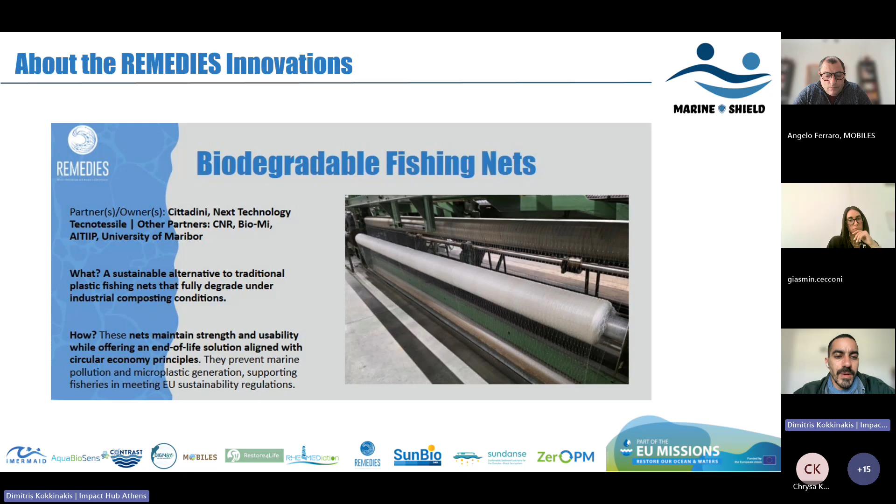Moving on, this is a solution developed by Cittadini, a big company that provides fishing equipment based in Italy, with a lot of different partners, like Next Technology, and also CNR, Bio-Mi, AITIIP, and University of Maribor. This is also a big innovation, a sustainable alternative to traditional plastic fishing nets that fully degrade under industrial composting conditions. So it's biodegradable nets, as we can say. These nets maintain the strength, durability, and usability, but they have an end-of-life solution that is aligned with circular economy principles. These nets have been tested with fishermen in Italy and in Mykonos in order to get valuable feedback for possible adoption of this type of nets from local communities. The idea is that they prevent pollution and microplastic generation, while they support fisheries in meeting EU sustainability regulations.

Moving on, this is Wasser 3.0 PE-X. It's a company based in Germany with an innovative solution for the detection of microplastics in various waters and their removal using agglomeration and fixation, including a full reuse concept.

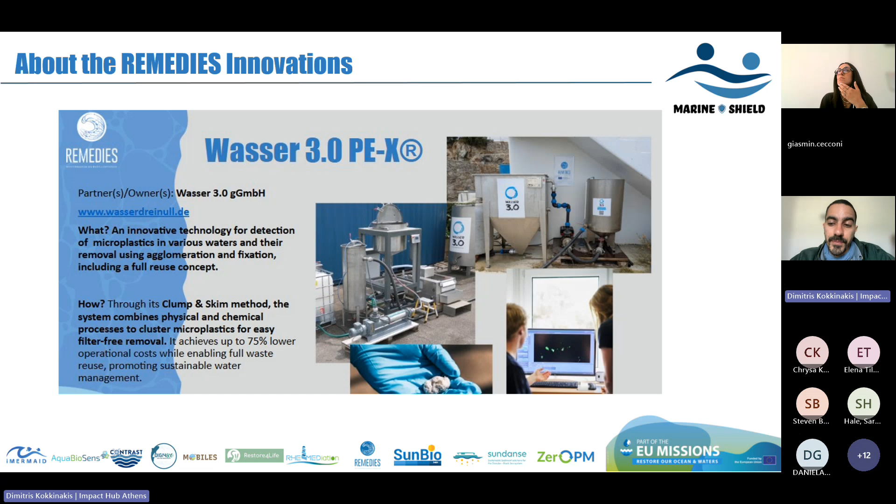It achieves up to 75% lower operational costs while enabling full waste reuse, promoting sustainable water management. The water that comes out as an output from the Wasser 3.0 treatment can be used for irrigation or for other purposes in agriculture or secondary uses.

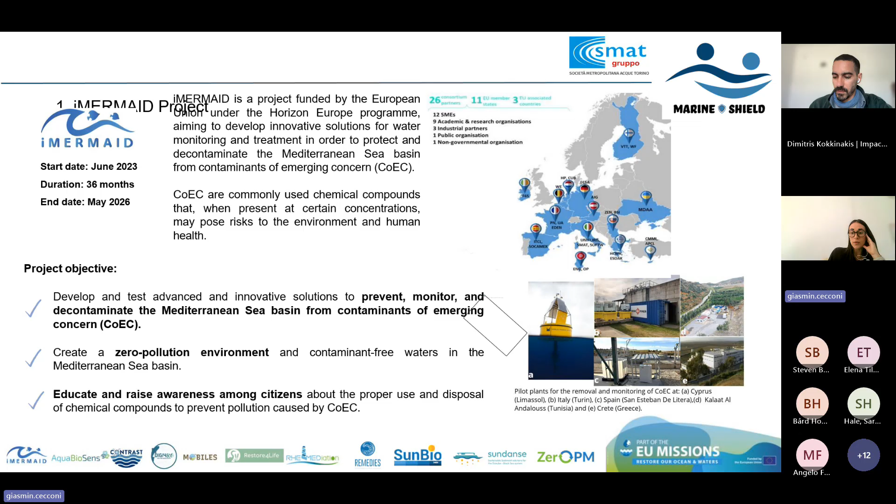The first use case is located on a buoy in Cyprus. The second, which I will present today, is in Italy at a wastewater treatment plant facility. The third is in Spain, at another wastewater treatment plant. Another is in Tunisia, at a wastewater treatment plant in an industrial site within a pharmaceutical industry. And the last is in Greece, at a landfill for monitoring leachate.

Today I will present use case number 3, entitled 'Pilot Plant for the Removal and Monitoring of Heavy Metals from Wastewater,' located at one of the wastewater treatment plants managed by SMAT, in Brandizzo, near Turin.

This wastewater treatment plant treats both industrial and domestic wastewater, which after treatment is released into the nearby river. The problem we wanted to target with this pilot is that if high concentrations of pollutants reach a wastewater treatment plant, they may not be completely removed and can be released into the water body.

The pilot to assess this problem had a duration of 2 months, in April and May 2025, and focused on the demonstration of two main technologies.

The first, developed by the Finnish startup Weeefiner, is called the 4D Scavenger, for the removal of copper, zinc, and aluminum. The second, developed by the University of Florence, is a heavy metal box based on an electrochemical sensor for monitoring zinc, cadmium, lead, and copper.

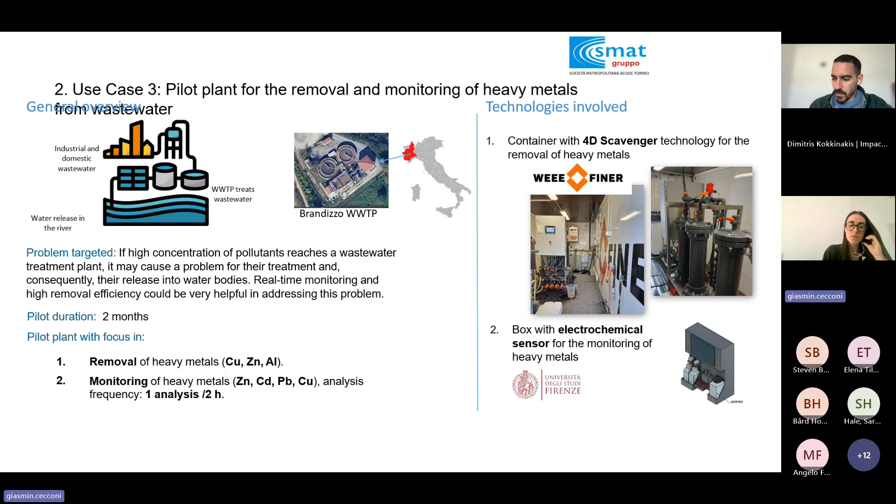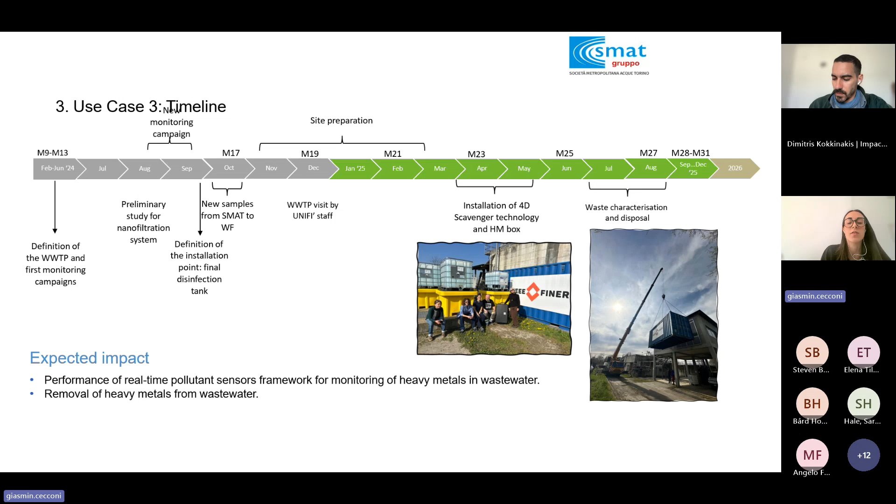Here I have reported a detailed timeline of all the activities we performed, starting from site preparation until the end of the pilot with waste characterization and disposal. I will present the main points.

First, we had to define the best site to install the technologies, which turned out to be the Brandizzo wastewater treatment plant. Here you can see an overview of the plant and its treatment steps. Then we had to define the best installation point for the technologies.

We did that by performing tests and also shipping samples to the technology provider. We took into account two possible installation points: the first at the fine screening step, at the beginning of the wastewater treatment, and the second at the end of the process, in the final disinfection tank.

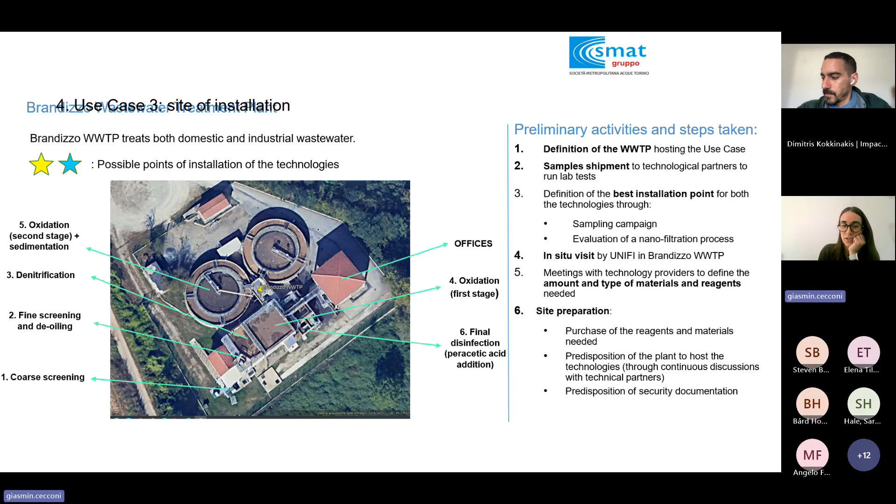To define the best installation point, we had to consider the requirements provided by the technology provider. For the removal technology, the TSS content in the wastewater should be below 5 ppm, while for the monitoring heavy metal box, we needed a TSS content below 25 ppm and a BOD below 15 ppm. To determine the best point of installation, we considered the historical trend of these parameters at the two investigated points, and here you can see the data for the final disinfection tank.

We also had to take into consideration the fact that Weeefiner, the supplier of the 4D Scavenger technologies, was able to implement and develop a filtration system that could remove TSS content sufficiently if the TSS content was below 20 ppm. Looking at the historical series, we see a median TSS value of about 7 ppm, so we concluded that the best point of installation is in the final disinfection tank.

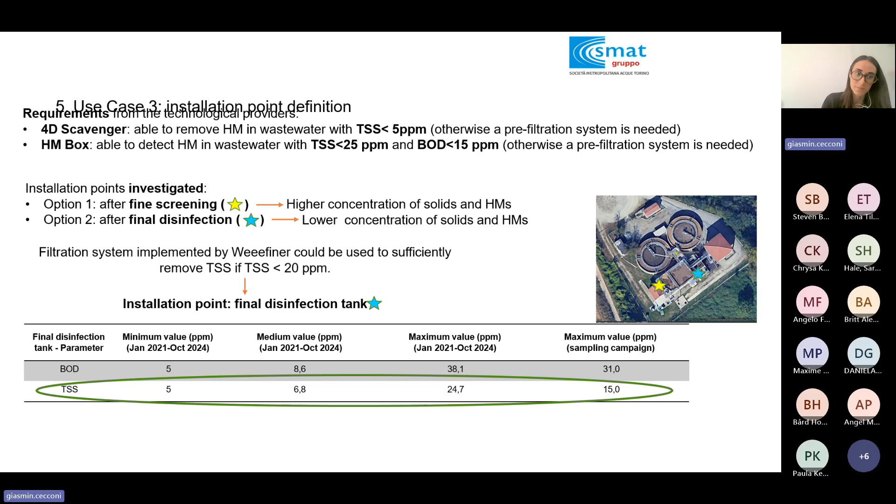In April 2025, we finally were able to host both technologies. The 4D Scavenger was shipped from Finland inside a container, so we used a crane to place the container and the technology in the wastewater treatment plant.

We had to provide electrical connection and well water. We had to supply reagents and equipment and prepare some solutions needed for the metal box, shown in the photo, to perform calibration and maintenance activities. We also had to provide on-site assistance for maintenance and to optimize the analytical protocol of these technologies.

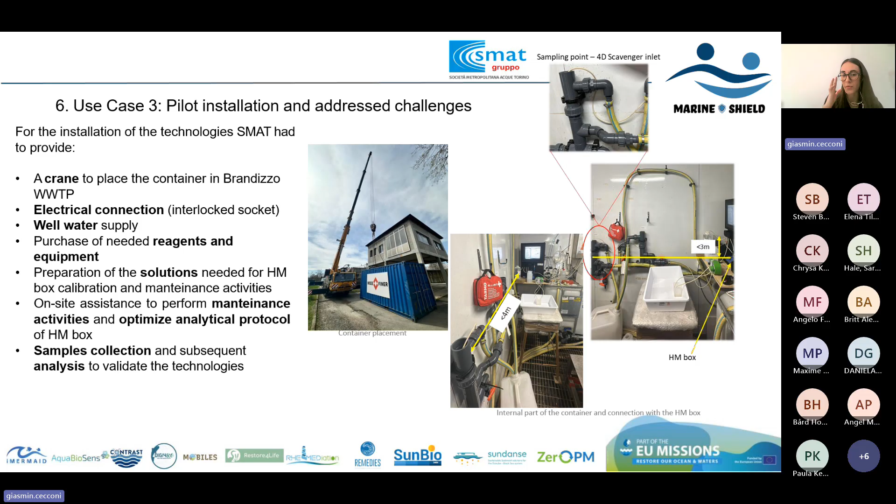During the pilot, we also collected samples in order to validate both technologies through analysis performed in our accredited laboratory. Of course, during the pilot, we had to address some challenges for both technologies.

We can start with the heavy metal box. I'm sorry that in the slides there was some movement, so we cannot see the titles very well. What we experienced was high electrical noise in the instrumentation, due to other instrumentation connected in the wastewater treatment plant.

We solved these problems by changing the pretreatment protocol of the sample, using hydrochloric acid instead of acetate buffer, grounding the instrumentation, and using a noise filter.

We also had the formation of air bubbles inside the measuring cell, which prevented us from performing the measurement. So we had to purchase an additional tank and an additional peristaltic pump in order to pump the water inside the tank and let it sit there to degas for 2 hours before analyzing it through the heavy metal box. In these 2 hours, the dissolved oxygen was able to be released into the atmosphere, removing the air bubble formation.

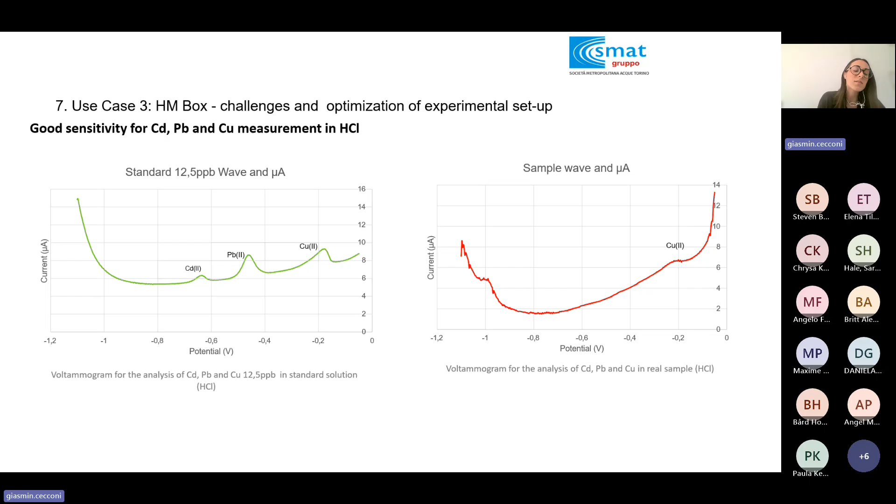Through this approach, using hydrochloric acid, we were able to perform analysis for cadmium, lead, and copper with high sensitivity. Here you can see a real voltammogram of one of the samples in Brandizzo, with a signal connected to copper.

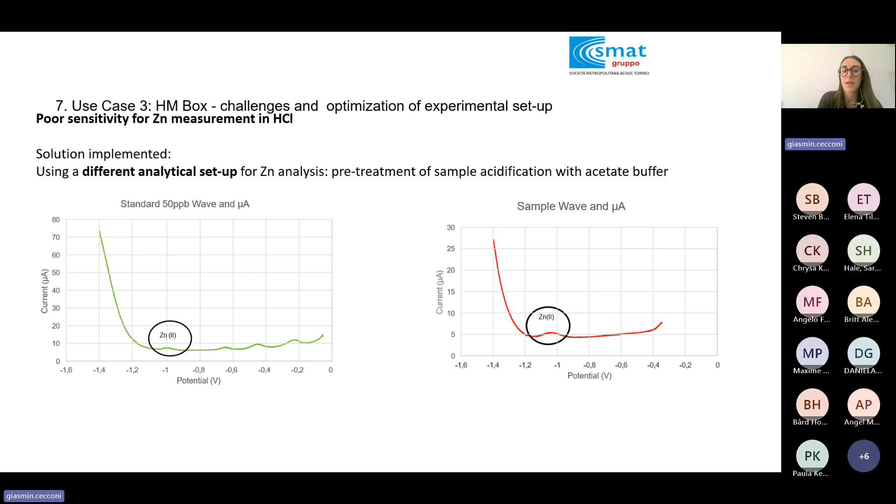But this approach wasn't able to give us sufficient sensitivity for zinc analysis. For this heavy metal, we had to switch back to the initial pretreatment protocol using acetate buffer, and in this way we were able to obtain very good voltammograms in real samples of Brandizzo. Here you can see the signal related to zinc.

Regarding the 4D Scavenger, the technology for the removal of heavy metals, more regeneration cycles than foreseen have been necessary, because once the capacity of the filters to remove heavy metals was full, we had to use two reagents, an acid, sulfuric acid, and a base, to wash and regenerate the capacity of these filters. During the pilot, we experienced that more regeneration cycles were needed than foreseen.

What was needed at this point, at the end of the pilot, was to reach the KPI and lower even more the limit of detection for cadmium. So more analysis and more tests needed to be performed at the University of Florence laboratory.

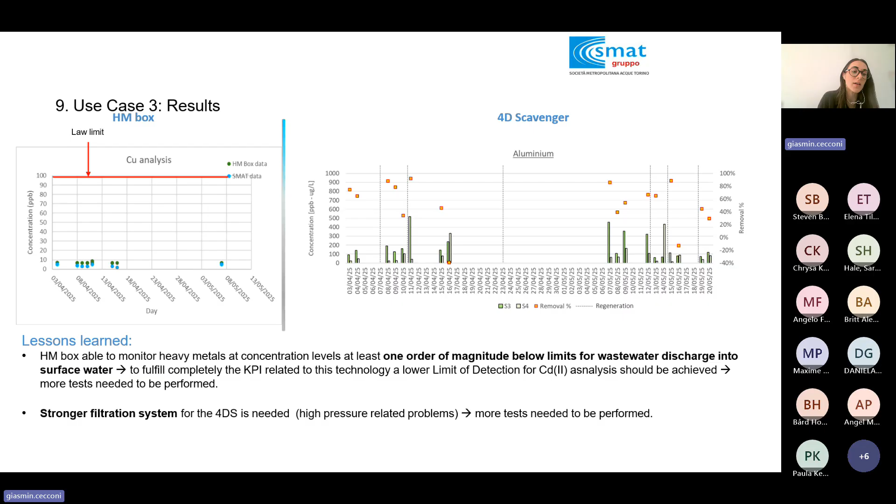So also for these technologies, after the pilot, additional tests needed to be performed. I will explain briefly the post-pilot activities done to reach the two KPIs. The first one for the heavy metal box is to reach a limit of detection below the predicted no-effect concentration, as you can see reported here.

As you can see, during the pilot, just for cadmium we were not able to reach a limit of detection that was low enough. So we had to do additional tests at the University of Florence, and they made adjustments in the measurement protocol of the system. You can see how we were able to lower this limit of detection below the PNEC value, and in this way achieve the KPI for all the targeted heavy metals.

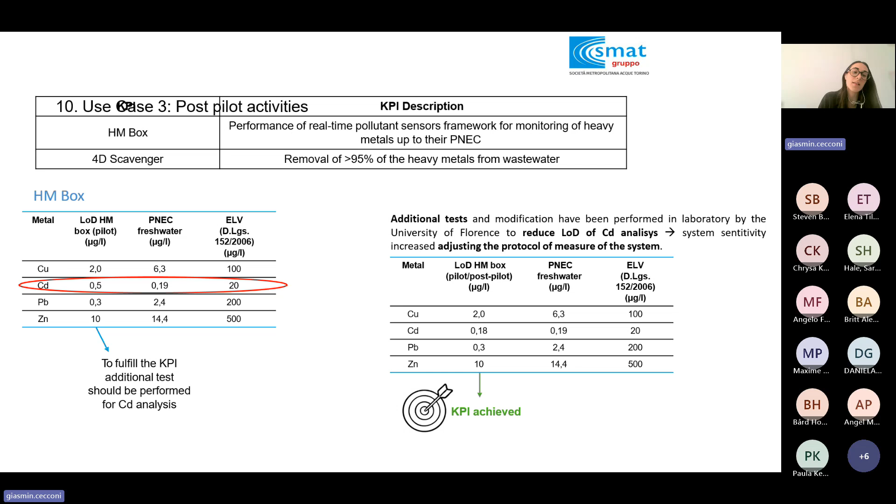They also did another pilot on site at a real industrial facility in Finland, just for zinc, and for bed volumes below 500 or 1000 they were able to reach this removal efficiency. So also for these technologies, with post-pilot activities, the KPI was reached.

That's all for my side, thank you for your attention, and let me know if you have any questions and we'll reply to them.

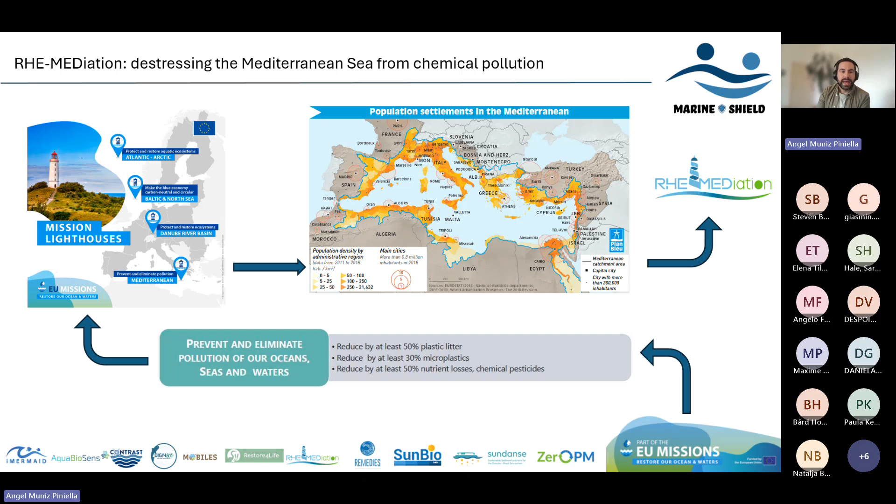Just a little explanation about wastewater treatments. So of course, when you have water, for instance from a city, you have to filter the water when it comes into the water treatment plant. Then you have the primary treatment, where it basically sinks the particle matter that is in the water.

Then you have a secondary treatment, which involves microbial breakdown of organic matter, and then you can have tertiary, which also treats nutrients. You can also have a quaternary treatment if you want to target more specific pollutants like pharmaceuticals or other industrial waste. And then you also have disinfection to remove potential harmful organisms.

Just as a reference, this is for environmental protection regulations. This is a black box. So in general principle, the pollutants that go in have to be more than what comes out, and whatever goes out has to be cleaner. In general, regulations don't care what kind of technologies or processes are used, it just has to be cleaner afterwards. So that's also the added value of the RHE-MEDiation system, that it can be plugged in after any already existing treatments.

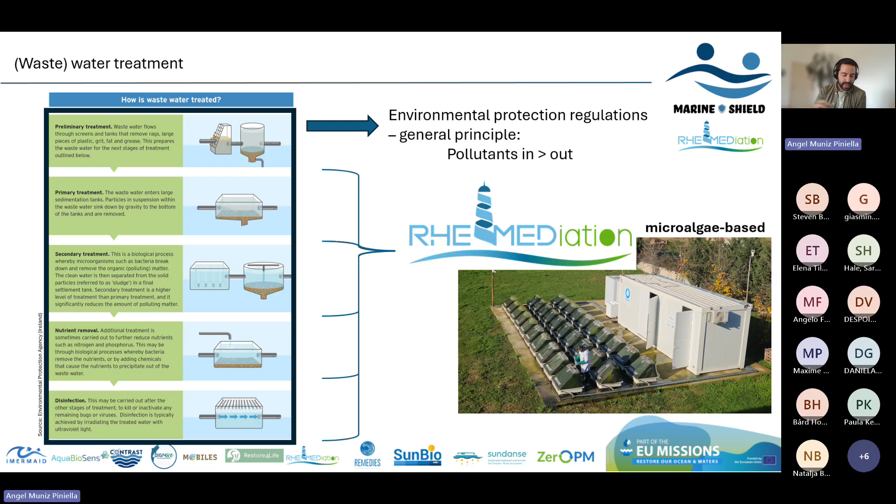So how does it work? I'll come back to what we call the RHE-MEDiation approach. You have the water that you want to treat, it could be natural waters, but also it could be from wastewater. Then it goes to the system, with the container and the photobioreactors. Within this container you have at the back the dirty water, which is monitored with different probes and measurements, because of course you need to assess what kind of pollutants are in this water, and know what needs to be treated.

So you need to measure this. Then that water that has been measured goes through the different photobioreactors, which promote the growth of the algae that is naturally present in the water. You don't have to add any other species or any chemicals, it grows naturally. So if you are a particle of water, you will travel through these different photobioreactors until you reach the end, and of course you can determine how long the water will stay in this system or not.

So that's also quite flexible, depending if you have really dirty water or many nutrients polluting it. The microalgae will use the nutrients present in the water, and also capture different pollutants present in the water. These photobioreactors act like an ecosystem of their own, because when the algae die off, they get remineralized by other algae, using the nutrients, so you don't have to clean it up too much. Then this water goes to this other tank that you can see at the forefront.

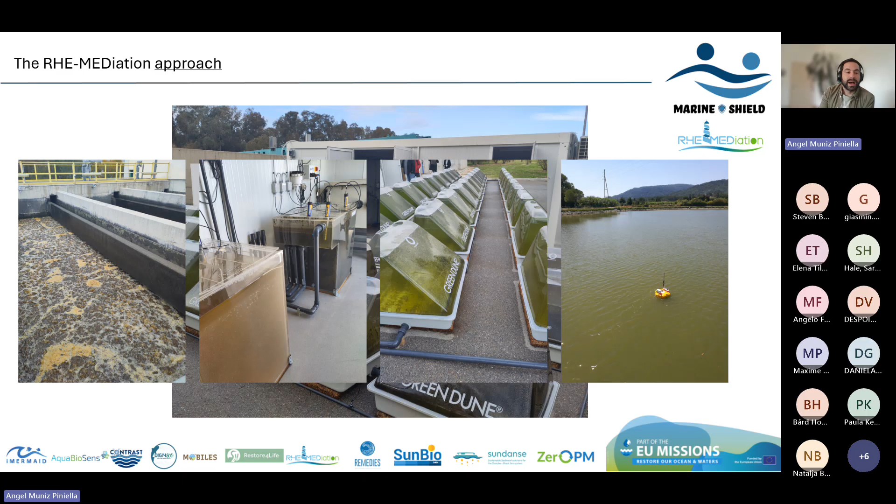So this is just a summary infographic of what I just explained, and I will present in a bit the different test sites. But what I want to highlight here is that the information coming from the sea trials - all these buoys that are in the environment at the end of the rivers, or also in marine waters - that information is transmitted to the European Marine Observation and Data Network, EMODnet, which could also be contributing to the digital twin of the ocean.

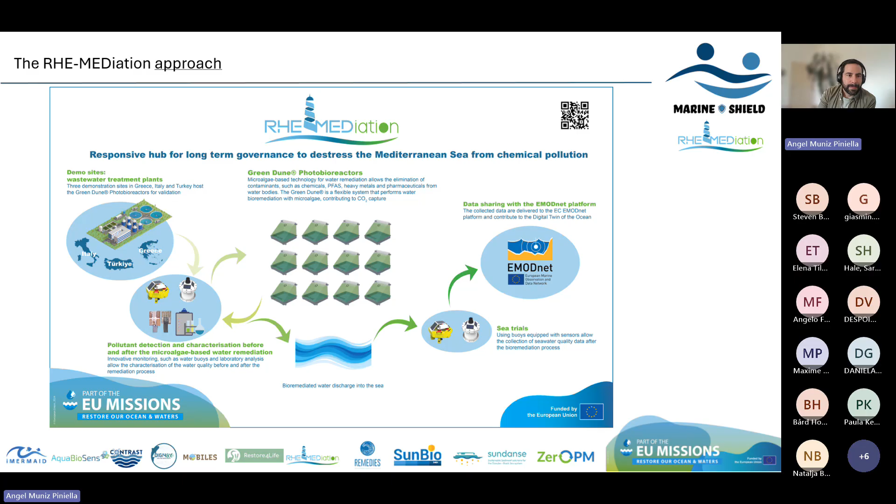For the testing sites, I will show different images of how the evolution of the water looked. One is in Taranto, Italy, where it was tested with natural water - this is when they just installed it and you have clear water. Then we also tested in a wastewater treatment plant in Attica, Greece, and then also in wastewater treatment in Kocaeli, Turkey.

We helped local authorities in Bulgaria, Egypt, Moldova, and Morocco develop replication strategies and roadmaps to potentially implement this kind of system. Of course we didn't fund the implementation of this technology, just checked what kind of water, and what objectives they want to clean the water for. So this is also, in terms of other projects, what we did through a call for associated regions.

What I mentioned is we call it the RHE-MEDiation approach, because not only the technology and the system, but also there was an important component: stakeholder engagement. So we did, at the beginning, in the different test sites, and also we will do in the next month, other stakeholder workshops, and also we engage with the local communities and local policymakers, and also they had visits from schools and so on.

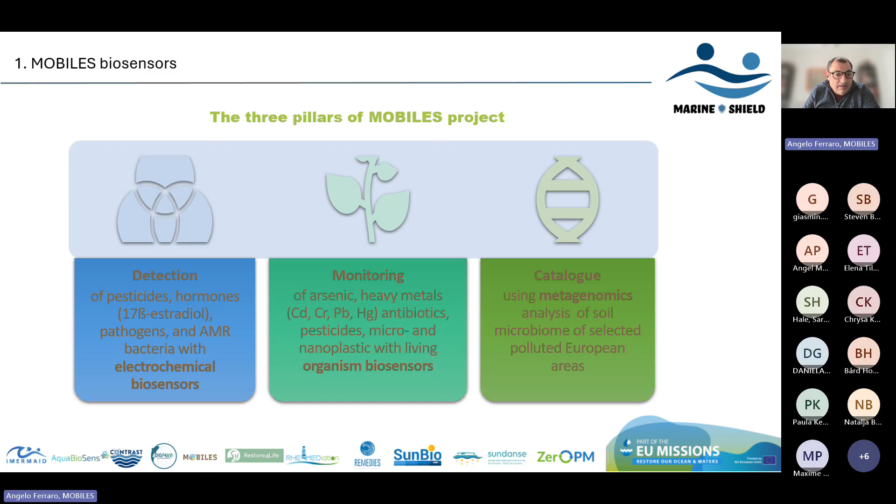So what are these electrochemical biosensors? Basically, they are formed by two components: one is the bioreceptor, also called the biorecognition element, and then there is an electrochemical transducer, so an electric circuit.

Here you can see these two elements. We can have antibodies, pieces of DNA called aptamers, enzymes, whatever, and usually they are attached, immobilized on the transducers - that is the electrode part of the system. So when these two components are together, they form a stable system where when chemicals, the target pollutant or any kind of analyte, touch the biorecognition element, it triggers an electric signal that can be detected.

And there are different techniques that we can use: differential pulse voltammetry, cyclic voltammetry, square wave voltammetry, electrochemical impedance spectroscopy. Each one of these techniques gives a sort of wave, and the wave is perturbed when there is binding between the biorecognition element and the target pollutant.

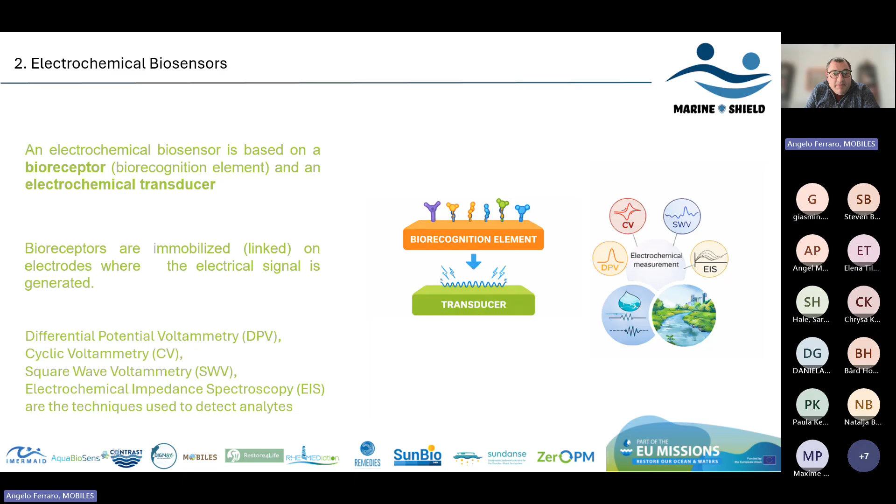Now, the typology of electrochemical biosensors are many. Usually, we use natural bioreceptors that can be found in organisms - as I said, antibodies, enzymes, nucleic acid, but also viruses. These are bacteriophages - viruses, whole cells, membranes, or also organelles.

They are a small part of a more general family of electrochemical sensors. So when you use a bioreceptor, we call it a biosensor, but you can even use inorganic stuff like nanoparticles or organic linkers, both synthetic or natural. You can construct with almost any kind of material a sensor where you immobilize a receptor on an electrode, and then you measure how it changes the electrical properties of the electrode.

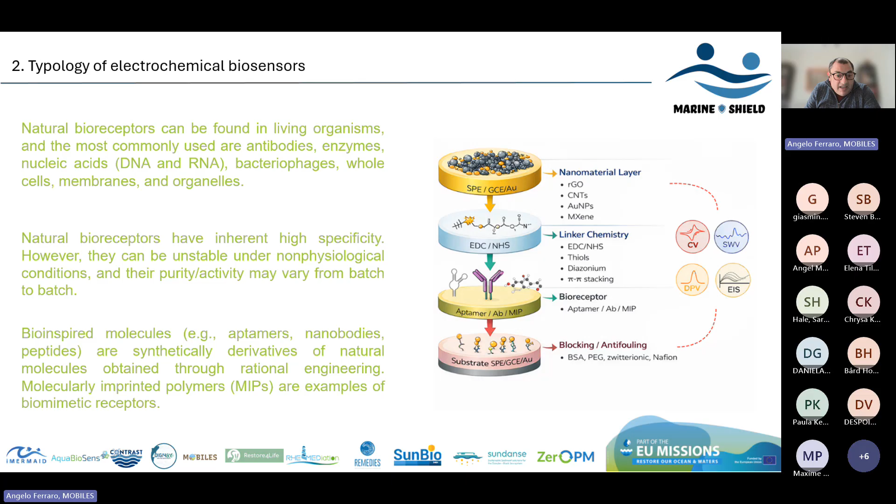Now, let's focus on the aptamers - what are they? They are single-strand DNA, RNA, or XNA nucleic acid - I will come back on this X. They fold into a 3D structure, and this 3D structure gives them the ability to bind a biomarker, or it can be pollution, can be anything. This binding is highly specific, so when the biomarker attaches the target aptamer, this means we have high specificity and high sensitivity.

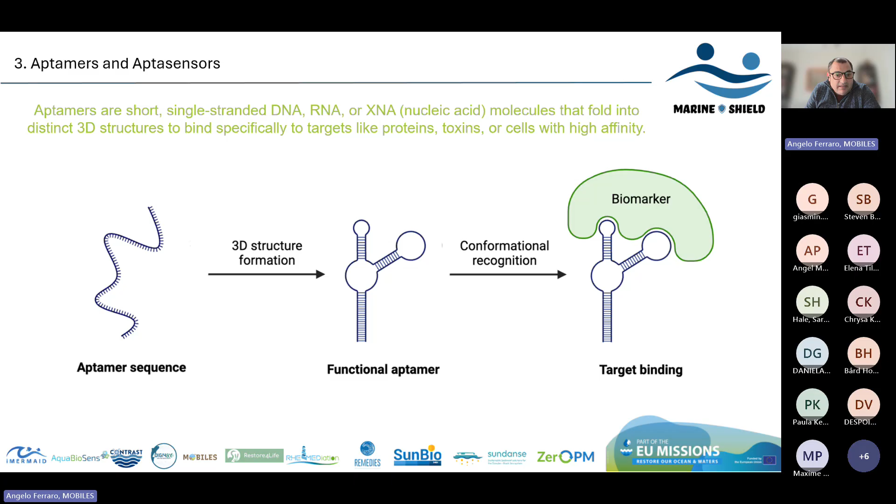Just to tell you what the X is here: usually you can have synthetic nucleic acid where the sugar, the R and the D - basically ribose and deoxyribose, two molecules that are sugars - when the sugar is substituted with another molecule, you get what is called XNA. But basically they give you a polymer of nucleic acid, and it's a standard technology.

I want to also show you how easy, theoretically, it is to produce or select an aptamer, and that's why we use them - because they are easy to produce. The technology is called Systematic Evolution of Ligands by Exponential Enrichment, or in short, SELEX.

So once you have your target molecule, you can put it in contact with a library of aptamers that are a random sequence of DNA, but not exactly random - in any case, they have to form this 3D structure. You put them in contact, allow them to react, so they form some complexes. Once they form the complex, you isolate it, then extract just the piece of DNA or RNA, and amplify it using PCR.

PCR is a standard technology used in molecular biology to amplify DNA, and you end up with your aptamer that is enriched. If you repeat this SELEX process a couple of times, you end up with a very good aptamer that has high affinity and high specificity for the target, comparable with the performance of an antibody.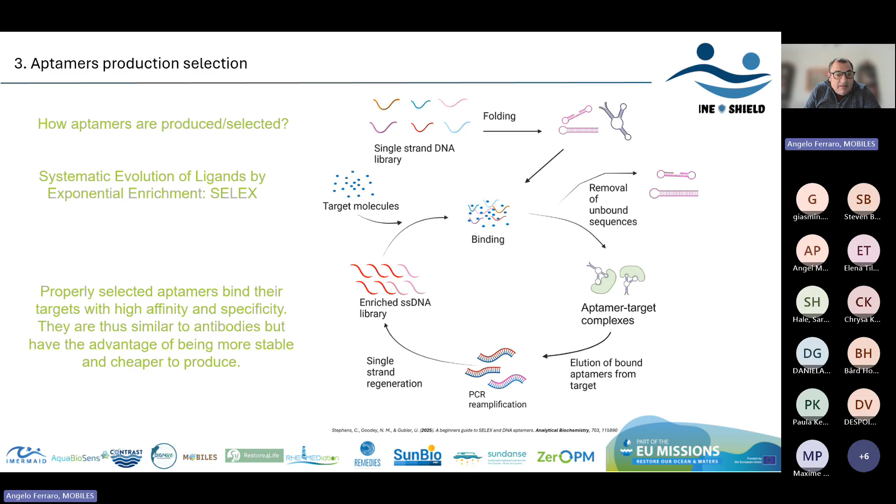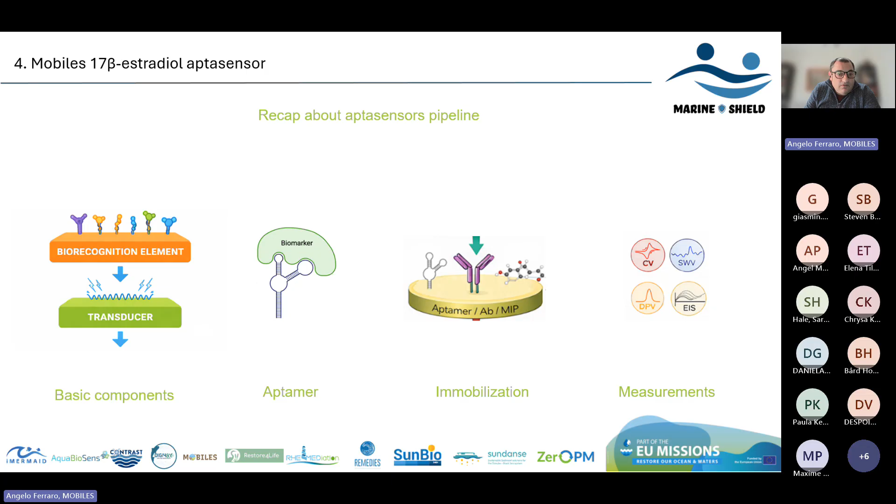Now I'm going to show you the aptasensor that we are going to use for the estradiol. Just to help me, I will do a recap. For an estradiol biosensor, we need two components: the biorecognition element, which is the aptamer, plus the transducer. Then we need to immobilize the aptamer on the electrode, and then take measurements. So we will see these four steps point by point.

The first thing we use is the electrode. These are called screen printed electrodes, and it's gold. This yellow material is gold, a very thin layer of gold. Then there's also a third one that's silver, but this is just how it works, because we need to have a reference electrode. Usually we use this standard one, but we also test others, and I'll show you later.

And then you need what is called the transducer, or the readout circuit. That's an electric motherboard. We customized it, designed it, and bought all the components in order to make it.

And finally, you need the aptamer. These are the aptamers we are currently screening, because we want to isolate one that has very high sensitivity. We took them from the literature but modified them a little bit. The most important modification is attaching a thiol group at the 5' and at the 3' end, not in the same batch, but in separate batches, because this thiol group is the key element that allows us to put the aptamers on the electrode.

And here is what we use to attach our aptamer to the electrode. We use a characteristic covalent bond formed between gold and sulfur, which gives a very robust but modifiable interaction that's of paramount importance in stabilizing nanostructures and transmitting electronic interaction between gold and sulfur-containing molecules. What does that mean?

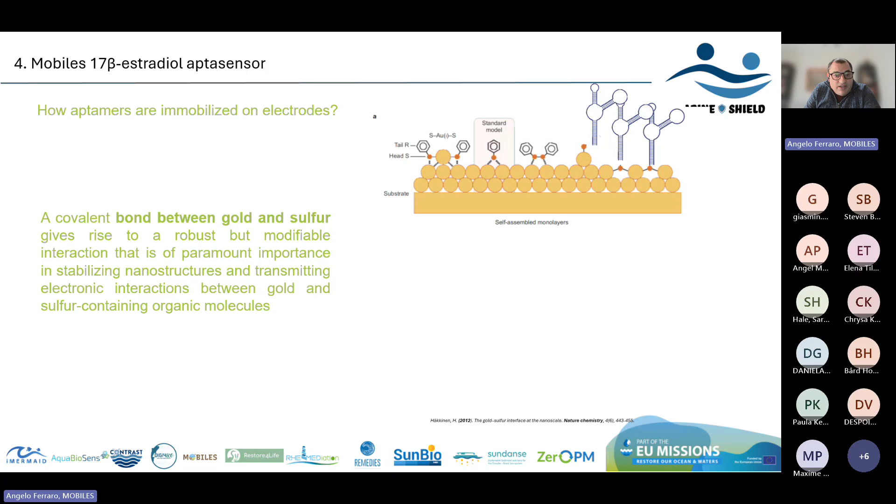Another good property is that when something is tagged with the sulfur group, it spontaneously forms a self-assembled monolayer. So you're sure you have just one unique and homogeneous coating of aptamers, and they don't attach one upon the other—they stick on the gold surface in a very smooth and clear way. This property is maintained also with gold nanoparticles, which can be used to form a sort of polymer using the gold atoms as a linker. And for the record, sulfur also binds copper and silver, but those have problems with oxidation, so we prefer gold.

So now, how are we doing our electrochemical biosensor? First, we order the primer, the aptamer, tagged with a sulfur group, and we deposit 30 to 40 microliters on the center of the electrode. There's the stem loop structure of the aptamer that binds after a few hours, thanks to the thiol group. After that, we connect our electrode to the rest of the readout circuit, and the whole system is ready to measure the estradiol.

When we apply estradiol, we can see that based on the quantity of estradiol in the solution, we have different amplitudes of the curve. We're now testing it for sensitivity, and of course the system isn't finished, because we need to put a case on it, and we need to add a display, since right now it works with a laptop. But at least now we know what is the best primer—sorry, I sometimes say primer—the best aptamer to use to identify the estradiol.

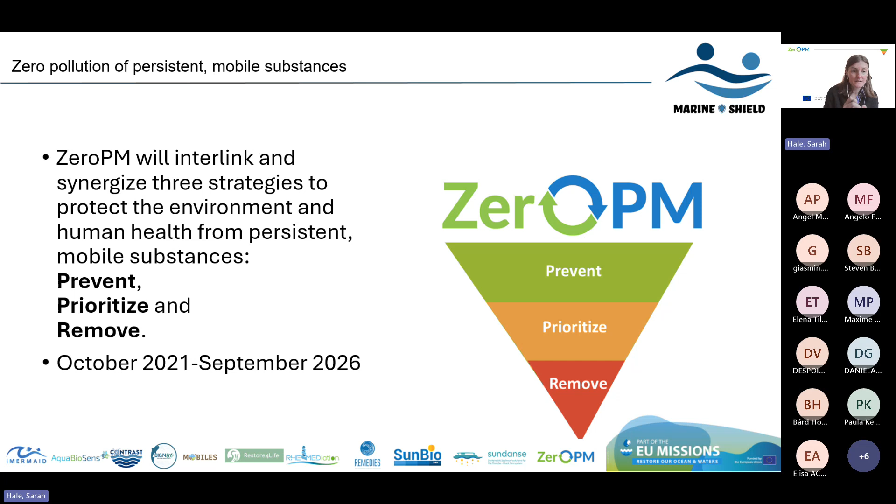Our project is very heavily inspired by the chemical strategy for sustainability. We use the same kind of triangle, the same color scheme, but we also take the view that we need to interlink all three strategies. Otherwise we won't be able to clean up the environment, improve our livelihoods, and reduce costs of basically everything.

In ZeroPM we have 15 different partners working together across work packages: 3 focus on prevention, 2 on prioritization, and 1 on removal. Today I'm going to talk about the work package on removal, since that's what this webinar is about. First I'll go through each of the different work packages—these are actually different slides than the ones I sent, but never mind, we'll use these for now.

I'll tell you a little about each work package and then talk about the results we have. In our prevention work we look at alternatives assessment, policy, and market transition—trying to find different substances to replace these harmful, persistent, mobile, toxic substances, and work out ways for different stakeholder groups to use them to reduce exposure and minimize risk.

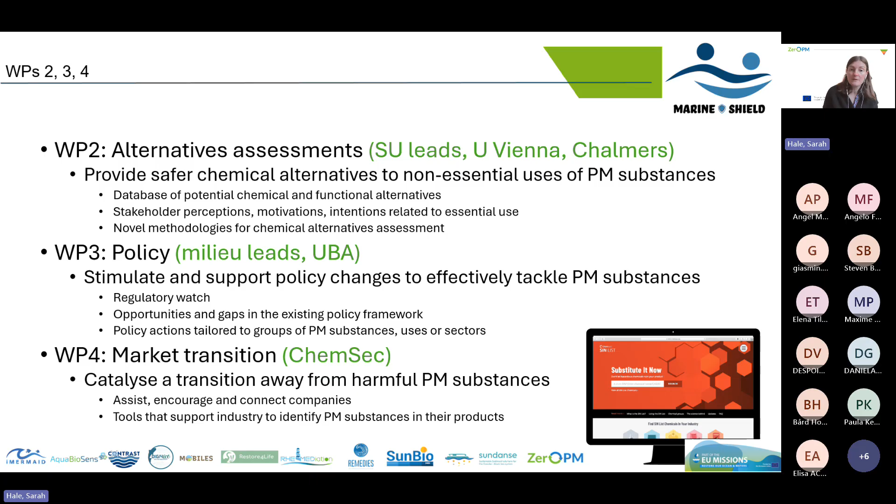We work a lot with different companies. Some are able to transition away from these substances; others are just at the start of this transition and don't necessarily have the knowledge and tools, so we try to provide them with things they can actually use. One of the things we've made is the PFAS guide, where companies can click and see whether they have PFAS in their supply chains or not.

In the work packages related to prioritization, we're looking at how we can group substances. The universe of PMT and vPvM substances is huge, so we need methods to group them.

A good example is PFAS. PFAS fall in this group, and this is how they're going to be regulated. But there's also other ways we could group them, by looking at things like dead-end transformation products and putting those as a group. They all start from different things, but end up as the same thing in the environment. TFA is an example here.

We have a work package that looks at risk assessment. We're trying to find different and better ways to do risk assessments, specifically promoting the inclusion of NAMs in policy. I think this is one of the things that lots of projects are working on at the moment.

We're also looking at technical solutions. What we're trying to do is work with water and also sewage sludge. These are the two media that we've decided to focus on, and we're looking at innovative solutions for how we can remediate and remove these persistent mobile toxic substances.

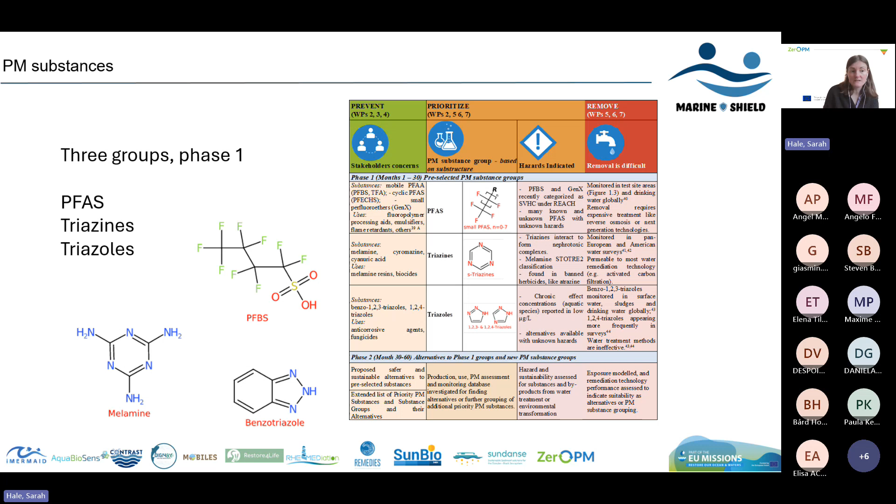What we have done in ZeroPM is we focused on 3 different groups. When we first started, there was some focus on PFAS, perhaps not as much as there is now, but we're looking into PFAS, triazines, and triazoles. These are groups where within the group themselves, some substances are already regulated, and they all contain problematic moieties - parts of the chemicals - which means we know when they're in the environment, there'll be a problem. So what I wanted to focus on a little bit was to show you some of the results.

I'm not going to click on anything, but when you get the slides afterwards, you can go through. So what we've done in ZeroPM is we've made an alternatives assessment database. This is basically a large Excel, but turned into a database where you can go and find functional alternative chemicals to PFAS across different uses.

So we took a use where we know that PFAS is being used - let's say ski wax. Then we looked at why PFAS was being used in the ski wax. Then we looked at what alternatives we could have instead of the PFAS in the ski wax that would still deliver the same product function and the same level of function. So that's the database there.

At the moment it's just for PFAS, but we will extend it to different PMT substances. We also work with behavioural psychologists in ZeroPM to try and understand why people think certain things might be essential, or why people want to use products and what they think about having PFAS in their products.

So we have a lot of data where we've spoken to different stakeholder groups to see how, for example, the European Commission could implement the essential use concept. This is very difficult because some people think essential means one thing, and for other people essential means a different thing.

We're also working with improved life cycle assessment methods. Often these frameworks are not necessarily taking into consideration the properties of the PMT substances. Because they're persistent, they're in the environment for such a long time that it means additional factors need to be considered.

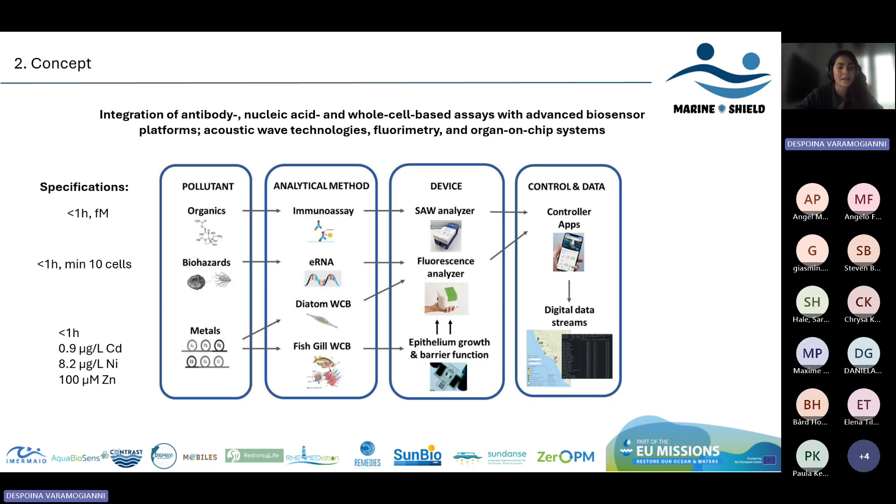So our systems are using high sensitivity analytical approaches based on antibodies, nucleic acids, or whole cells, in integration with state-of-the-art biosensing technologies such as acoustic wave transducers, fluorimetric systems, as well as organ-on-chip systems, as you can see in the figure. And real-time data can be interpreted by using simple and easy to handle smartphone apps.

Here you can see the list of the target analytes described in the AquaBioSens proposal. It covers a wide range of pollutants that can be found in aquatic ecosystems, such as hormones, antibiotics, or pesticides, naturally occurring toxins, microbes associated with harmful algal blooms or disease outbreaks, as well as heavy metals.

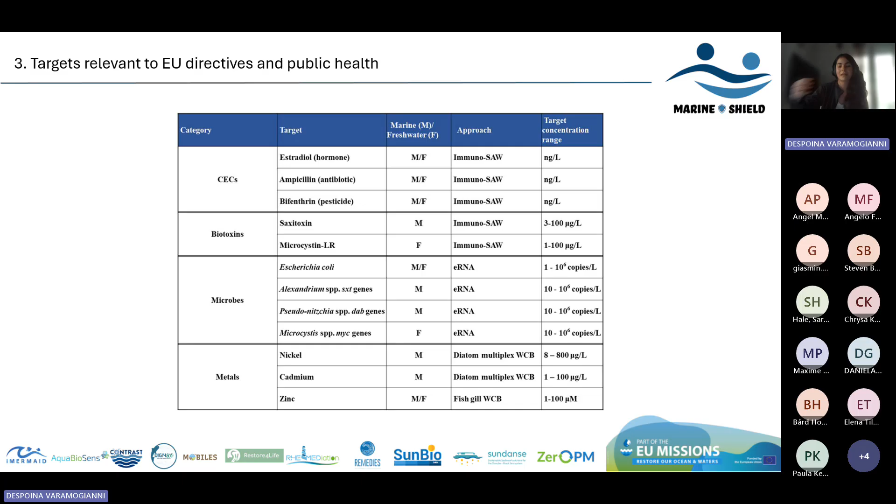For each target analyte category, we use a specific analytical approach, and we employ concentration ranges that are aligned with the European Water Framework Directives.

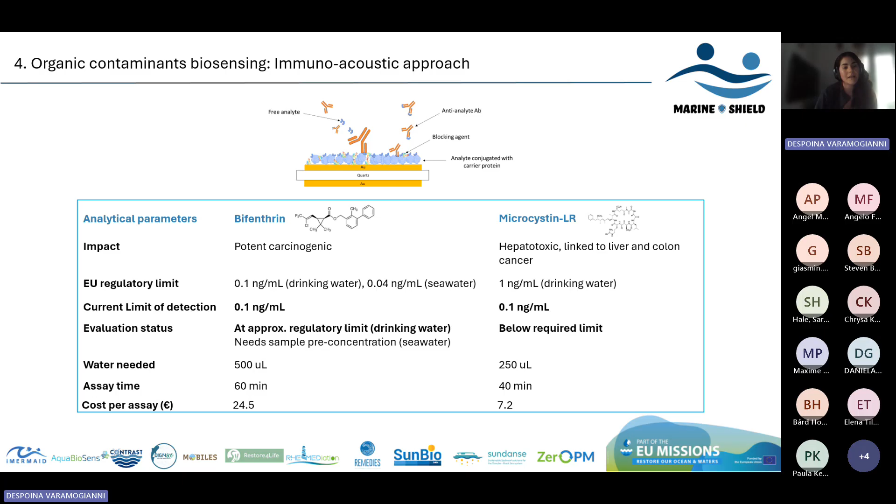For instance, by using the immunoacoustic sensing approach, we were able to detect pesticides such as bifenthrin or microcystin LR, which is a very toxic, very harmful hepatotoxin. We could detect both pollutants at concentrations that were at approximately or even below the European regulatory limit. Low-cost results could be derived using minimum water volumes and within 1 hour or less.

So regarding the portable devices, we use for each pollutant type a specific setup. For instance, for organic contaminants, we have designed a pre-concentration system in order to elute the analyte into higher concentrations and smaller water volumes, in order to be able to detect it with desired sensitivity in the immunoacoustic portable device.

For the quantification of microbial RNA, we use cell capture and RNA extraction tools, and quantification is implemented using an optical fluorimetric system. Also, we use whole cell biosensors based on diatoms or fish gill epitheliums in order to determine heavy metals in aquatic systems.

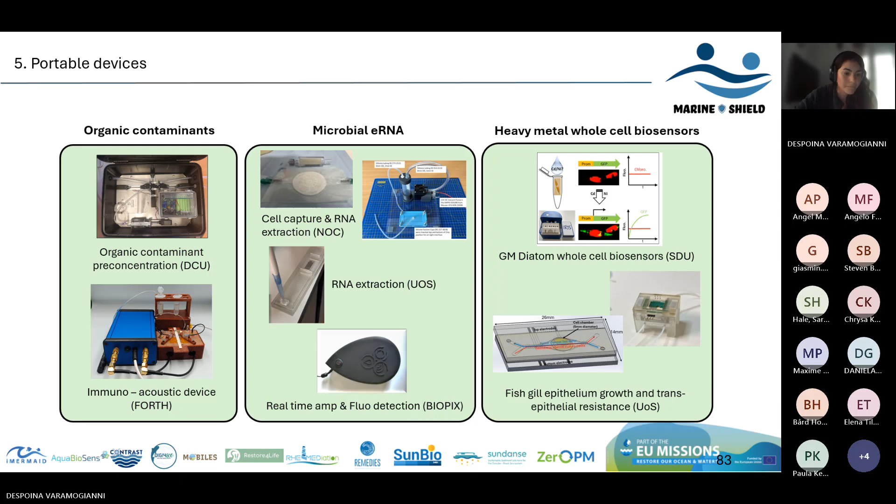Last but not least, a sampling procedure is being scheduled across many hotspots in Europe, such as Southampton Port or Dublin Bay in Ireland, where our developed portable devices will be tested with real or simulated samples.

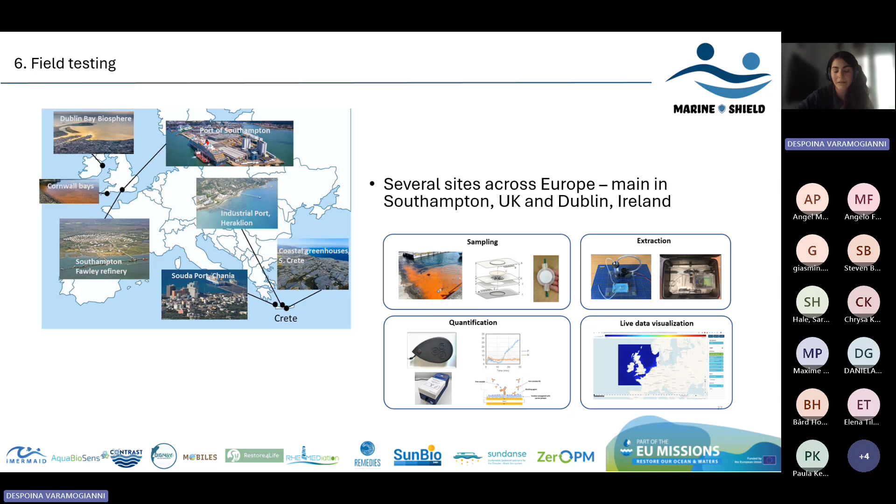Since we are at the last year of our project, current work is focusing on finalizing the whole design of our sensors, and validation of these devices will be demonstrated by using simulated samples first in the lab and at a later stage at various places where pollution has been documented across European countries.

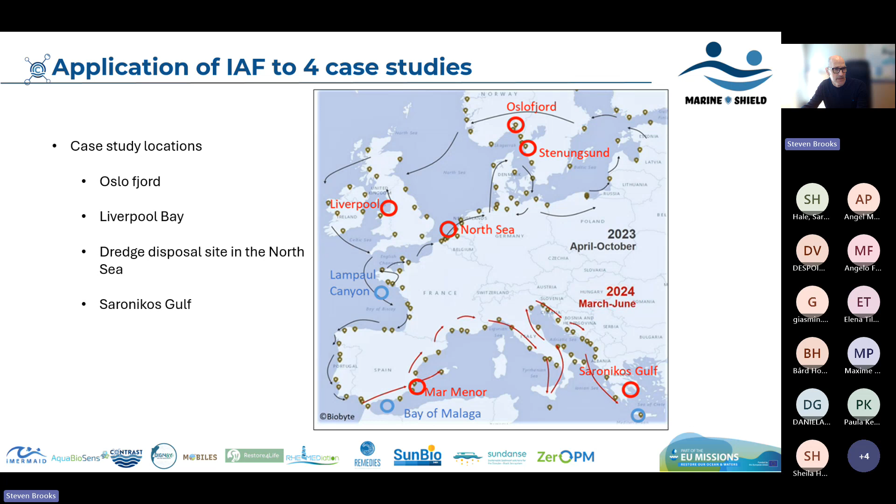Okay, so we have 4 case studies within the CONTRAST project which we're targeting. Today I'll just focus on one of them, to give you an example of the work we're doing. Here you can see the Oslo Fjord, Liverpool Bay, one in the North Sea, and then one in Saronikos Gulf down in Greece as well. So these are the 4 that we've considered that we will look at. But I said we'll just focus on Oslo Fjord on this occasion.

Okay, so again, we're looking at collection of sentinel species within the environment. Here in the Oslo Fjord, you can see a map. There's an inner fjord here, and a sill dividing the water bodies from the inside to the outside, so there are very different chemistries and conditions within the different water bodies.

Here we're looking at native mussels as one of the target species, collected from 5 stations. Three stations are within this urban area, Oslo, where there's a sewage treatment plant coming in, lots of boating activity, and runoff from industrial activity, so this is considered much more polluted than further out. We have additional mussel stations in the outer fjord near Drøbak, and one further down in the Hvaler area as a reference location.

The idea is to collect mussels, roughly about 100 per group, trying to get the same age or size class, so it's easy for comparison.

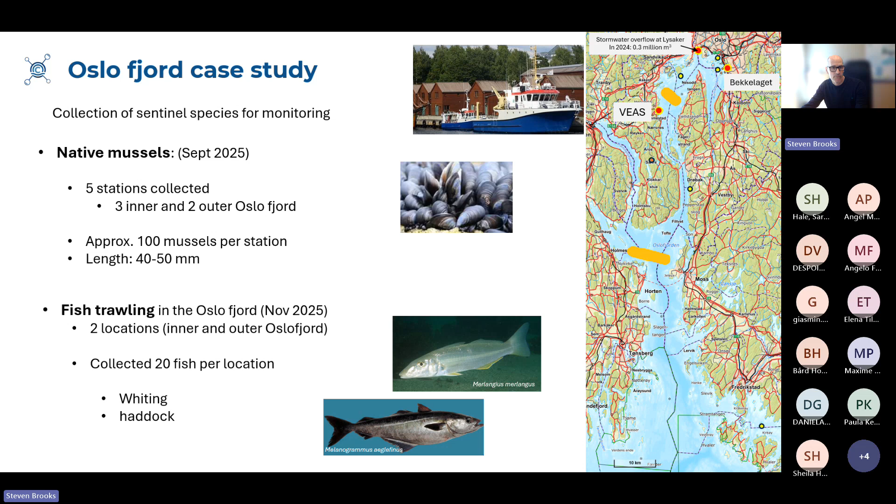So what we want to apply, and the concept of the project, is looking at the mechanism of toxicity of compounds. We apply this biomarker toolbox — an earlier work package looked at laboratory testing of chemicals of most concern, trying to find mechanisms of toxicity that may be interesting within the field. This is the field aspect, applying the biomarker toolbox to look at various mechanisms of toxicity.

We're also measuring several biomarker responses, such as lysosomal membrane stability for membrane disruption, metabolic impairment — cellular energy allocation and acetylcholinesterase inhibition — oxidative stress markers, biotransformation, and genotoxicity. So quite a broad spectrum of endpoints.

We want to measure these in different mussel individuals from the different locations, and link that with the chemicals of most concern measured in the soft tissue of these mussels. Part of the project is to identify which chemicals of most concern we should look at — we've identified 64 based on their properties, using a chemical prioritization scheme we've published to identify which chemicals are important to measure in our target species.

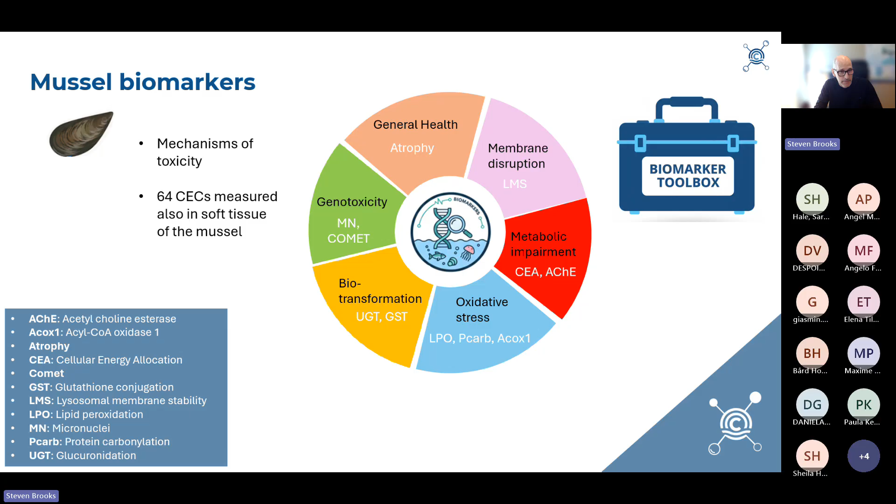So the plan is to integrate the biomarker responses with the chemical responses to give an overall indication of health status, and also whether there are any linkages between chemical exposure and biomarker responses.

We won't go into a lot more detail other than that we're looking at biomarker responses within target tissues, as well as CECs, and also non-target analysis that we'll be carrying out on the mussel homogenates.

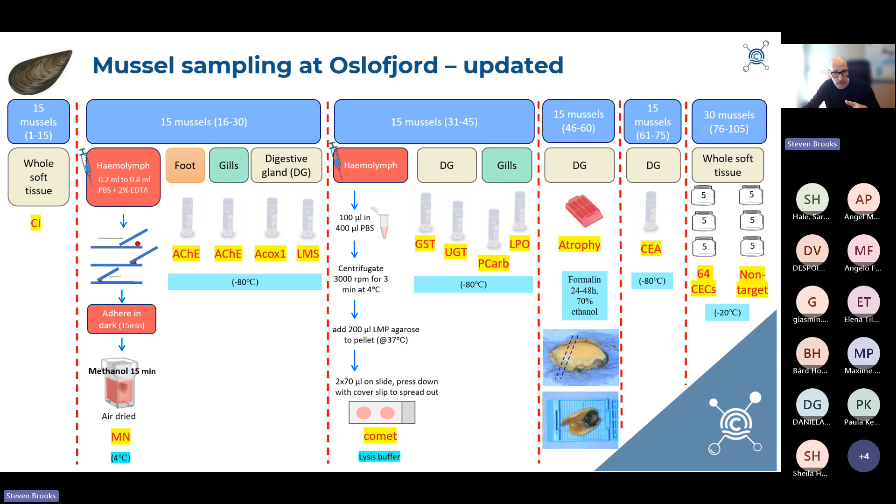In addition, we're looking at fish, and again at the mechanisms of toxicity in the fish and how these CECs can interact with and cause harm in terms of endocrine disruption, for example. We have a few endpoints or markers we're looking at, like histology, thyroid,

VTG responses — vitellogenin, if you're not sure what that is — membrane disruption again, neurotoxicity, cardiotoxicity, oxidative stress, immunotoxicity, biotransformation, genotoxicity, and carcinogenicity. So quite a wide suite, and we have more options in fish than we did in mussels, a bigger toolbox to apply to these case studies.

The idea is that we apply them, analyze the results, and then provide interpretation or recommendations of which endpoints seem most responsive, so that we could maybe suggest them for MSFD guidelines as well.

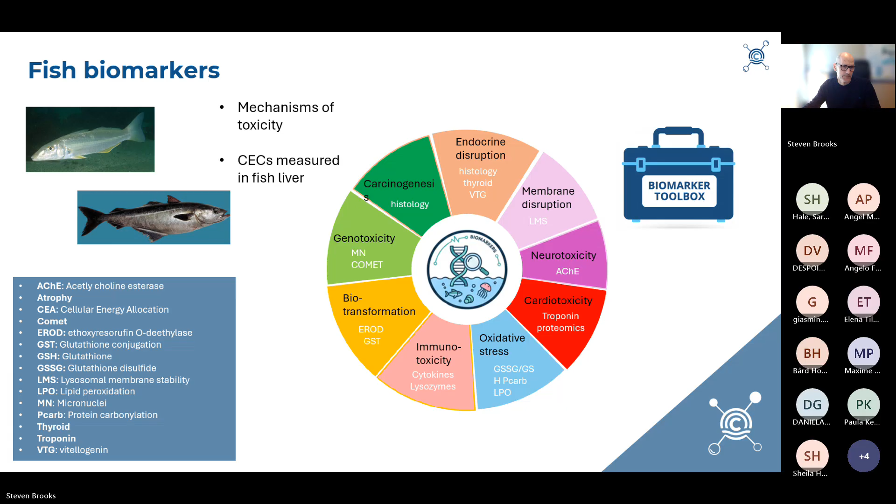And again, the sampling procedure for the fish is quite a bit more involved. We have blood samples we've taken for different endpoints. We're looking at whole blood for genotoxic markers, comet and micronuclei. And we're looking at other markers within the blood plasma of the fish as well, and various components we'll be analyzing.

Bile, I've mentioned before, we're looking at maybe transformation products and metabolites. We can look in the bile, since fish are known to metabolize many compounds. And then liver is a very important target organ for this type of work, so there are many endpoints we'll be looking at, including chemicals within the liver too.

Additional tissues, looking at gills, gonads, and the fillet of the fish, in addition to the heart with gene expression, and supporting information such as age from the otolith as well. So it's quite a comprehensive sampling plan that we propose.

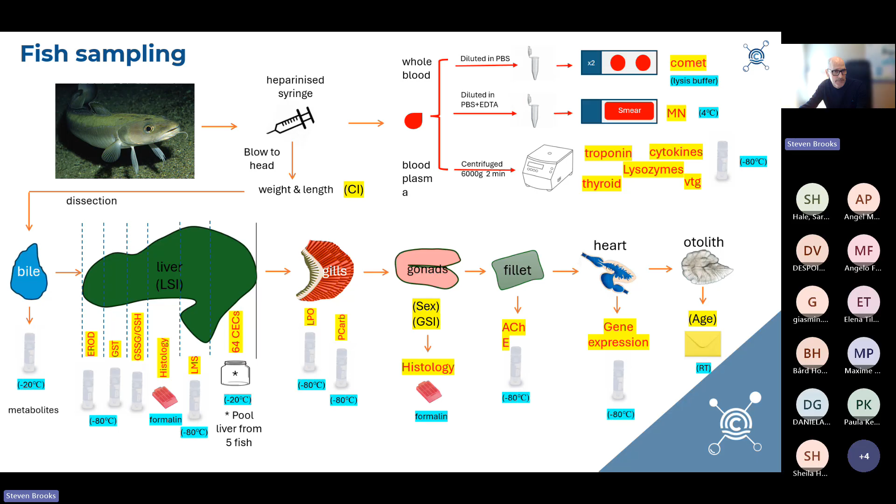So what we're going to do with this data - unfortunately this is still an early stage, so we don't have the chemical data to show you, it's still not available. But what we are planning on doing is apply it to integrated frameworks.

Also, maybe a traffic light system. A lot of the ICES working groups have presented some guidelines to this and done a lot of the work already. But we propose to use this sort of approach using threshold values: background assessment criteria, which is BAC, and then BAC to EAC, which is environmental assessment criteria. So these are different threshold values for the different chemicals or different biomarkers.

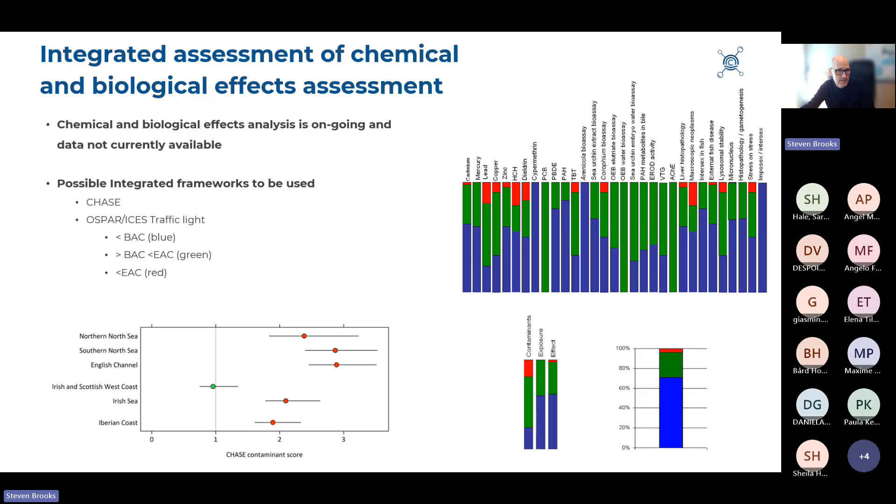Okay, and I think that's all I had. Thank you for your attention.

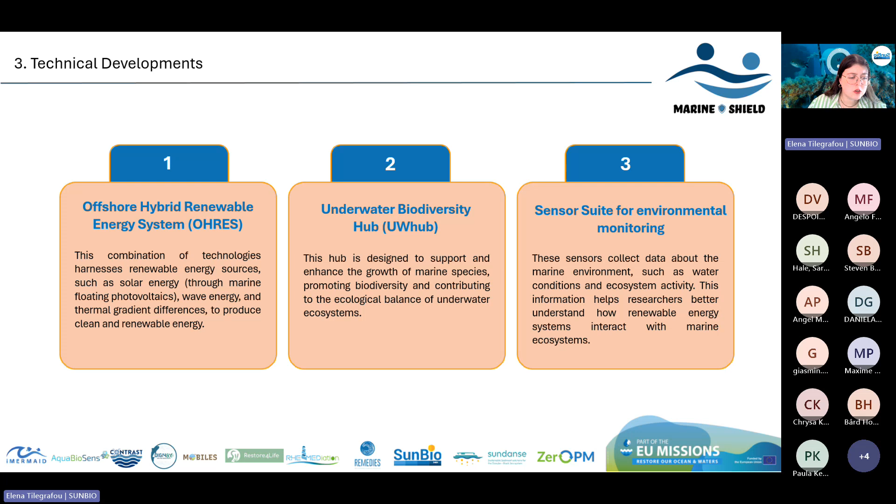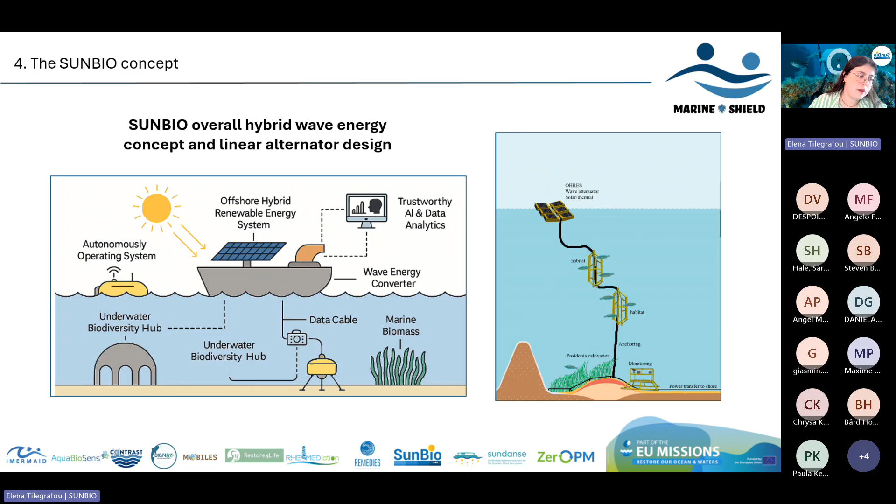From a monitoring to remediation perspective, one of the main pillars of SUNBIO is the transition from monitoring to remediation. First, environmental monitoring provides continuous data on marine conditions and ecosystem activity. Then this data is analyzed to understand how ecosystems respond to the presence of offshore infrastructure. Based on this understanding, targeted interventions could be implemented. In the case of SUNBIO, this includes the development of the Underwater Biodiversity Hub, which actively supports marine life and contributes to ecosystem restoration.

Our system is going to be tested in real conditions at the OBSEA Observatory in June 2026. OBSEA Observatory is the SUNBIO pilot site, located about 4 kilometers off the coast of Vilanova in Spain. This observatory already collects long-term ocean data, which is very useful for the system, as it allows us to compare new data from SUNBIO with existing environmental information.

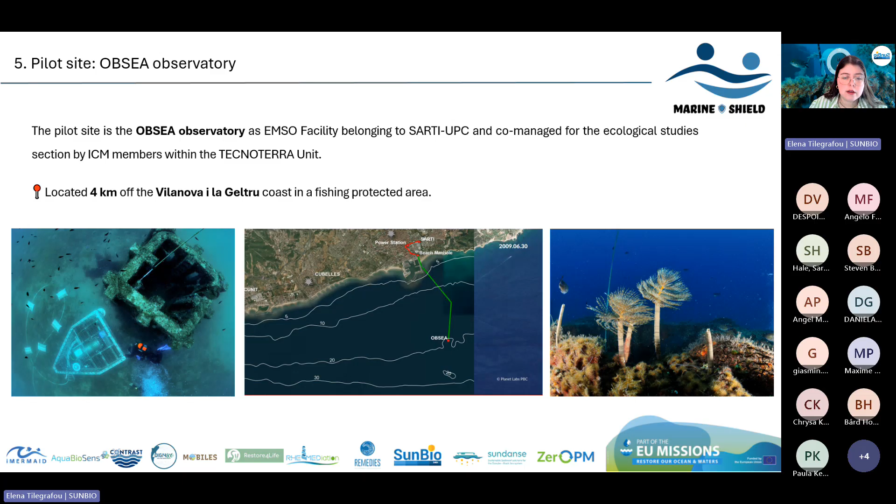So why does this approach matter, what's the positive impact? The starting point is ensuring that offshore energy systems do not compromise marine ecosystems. Through monitoring, it becomes possible to understand real ecosystem responses, and this creates the opportunity to move beyond impact assessment towards action, towards active ecosystem support. Finally, this contributes to a more sustainable and resilient ocean use. This is not a linear process, it's something like a continuous cycle.

Let me show you a short presentation of SUNBIO, which is also uploaded on our YouTube channel. I'm starting the video now.